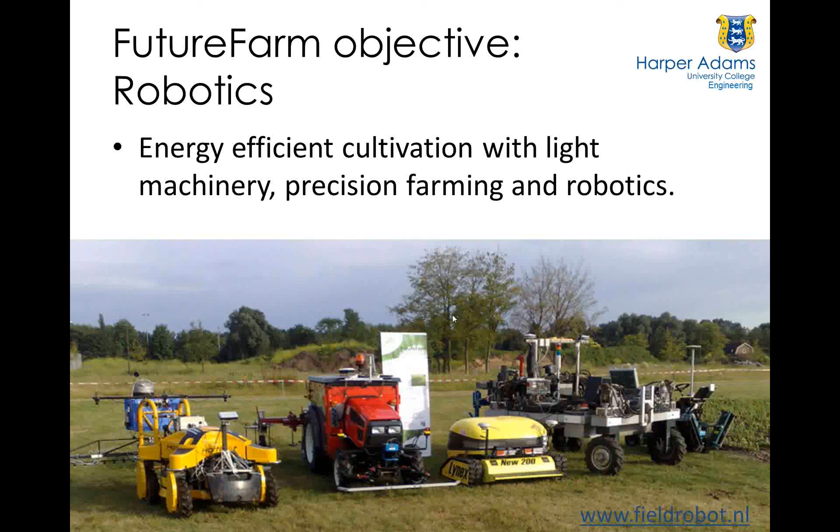Just a little bit of background: before I started here, I was project manager of the European Future Farm project, where we looked at how technology can be integrated together to come up with a better, more practical system. One of the aspects we were looking at was robotics. We had the field robot event, or tried to support it, and you can see a selection of the different robots that came together to show what they could do in practical agriculture and horticulture.

So if we try to look forward, one of the things we often do is look backwards first. If we look at how people perceived agriculture many years ago—we think we're pretty clever now, coming up with automatic steering and driver assist, but there's nothing new under the sun really. The earliest automatic steering system I could find is from 1885.

It's interesting how people considered what agricultural machinery would become in the future, and often it was in terms of industrial type farming, dealing with large areas and big machines, often very efficient machines, but often in terms of modifying the environment to suit the machines.

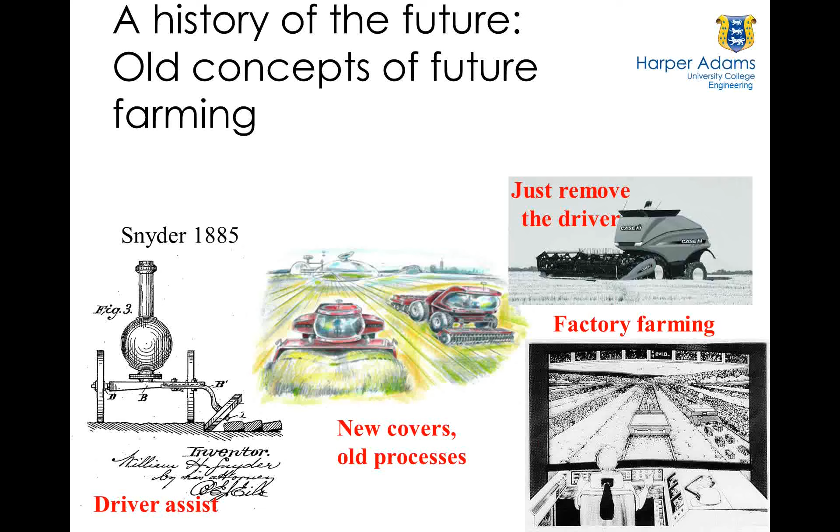But I think we're now at the stage where we should be able to develop smart enough machines to go out into the natural or semi-natural environment and deal with those situations—sensing themselves, sensing their environment, and changing their behavior according to the context they find themselves in. So I tend to think we should make machines smart enough to deal with the semi-natural environment, not laser-plane all the fields into huge, totally flat areas, but make the machines do what we want them to do.

We've seen equipment getting bigger all the time. Current mechanization is very efficient.

The amount of time that a tractor or an operator spends per hectare is getting lower all the time. This is economies of scale, and that's the main reason tractors are getting bigger all the time, to make use of economies of scale. But if we think about the tractors and equipment we see on farms today, are they going to be twice the size in ten years' time? Ten times the size? I think most of us would say definitely not.

So how can mechanization be improved in the future? To me, the obvious way is that it's going to be a lot smarter. In the meantime it's going to be smarter on manned machines, and eventually smart enough to become autonomous.

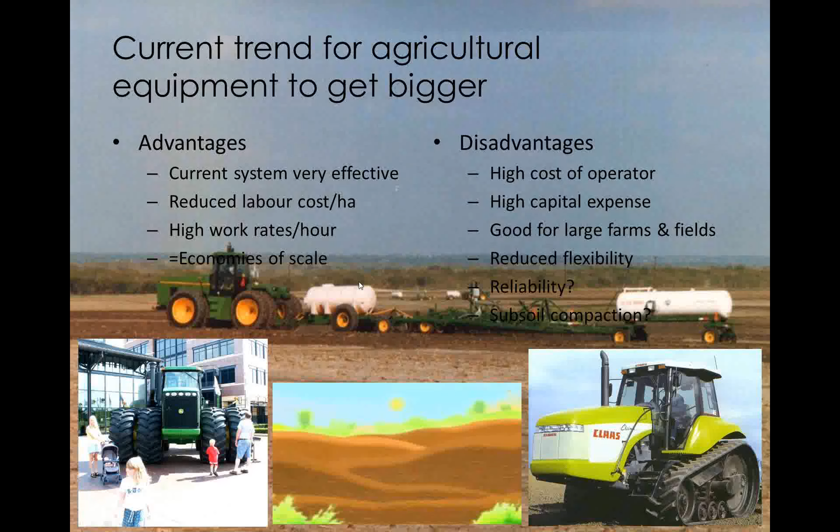So what we're talking about at the moment is a system, as we're developing it in the universities, that will be smaller and smarter. I know Timo's got an exception because he's got a great big tractor that he's robotizing at the moment. But until we know more about what is safety and what is reliability, I think the smaller machines will move ahead quicker. And when we understand what is needed for reliability and safety, it can then scale up to any size machine.

The main driver that made me think about coming back into robotics was the concept of management units. In traditional agriculture, farmers apply the same rate across the whole field—if they apply fertilizer or seed density, it's the same rate everywhere. We saw with precision farming that where there's variability in soil types and yields, it makes sense to divide the field with virtual boundaries to have variable dose rates or patch application.

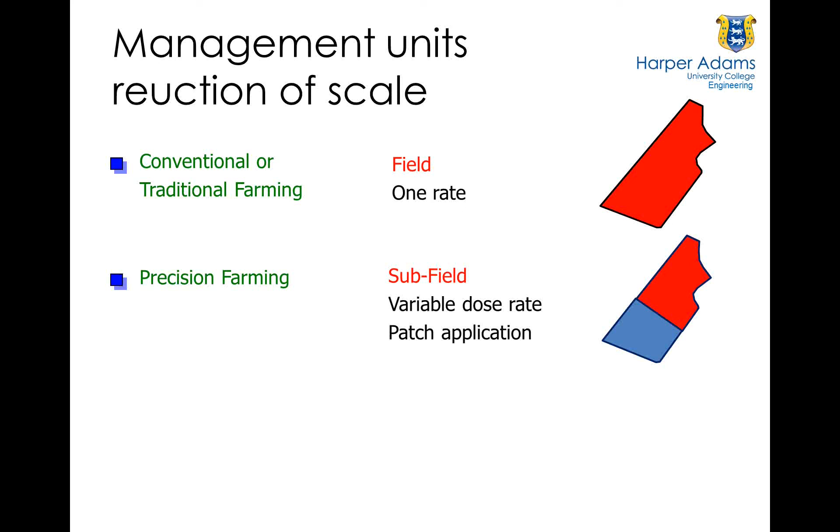We then realized, well, if it's better to get more control over smaller areas, how small can we go? Certainly what we've seen from research is that we can go right the way down to single plant care, plant-level husbandry, or as our Japanese friends call it, phytotechnology—plant level technology.

But of course, if it's a manned machine, it doesn't make sense to treat individual plants necessarily, because it might take too long to treat each individual plant. So there are sort of compromises here.

The autonomous machines are capable of treating each individual plant, but in some respects it's often limited by our scale of management. If we have an on-the-go system that can measure an individual plant and treat an individual plant, then I think we can have full automation.

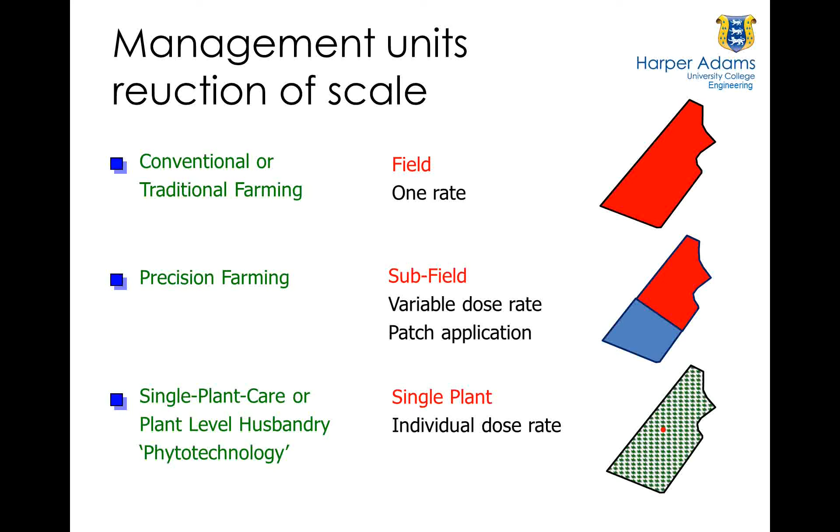But if it requires management decisions to decide whether to put more or less on in this patch, then the size of treatment is the management unit, and that will often be significantly bigger than an individual plant. So we're starting to see the limitations to which these treatment regimes can go down to, and as I say, we do have the possibility of going right the way down to individual plant scale.

I mentioned that I like to take a systems approach to these machines. A few years ago we realized that in modern agriculture there's a lot of pressures on farmers—particularly we found all this out in Future Farm. There's new laws coming on, clean water directives, changes in world prices.

The economics, environment issues and so on—that's on one side. These are all pressures off the farm coming onto the farm for the manager to deal with. And then we've got all of the agronomic requirements as well, of being able to grow the crops that you want. So in some respects what we did was start with a clean piece of paper.

We said, well, if we've got this wonderful range of opportunities from technology that can go right through to robotics, can we come up with a complete new system? Now, I'm not saying that system has been developed, but currently, as a group, we are thinking about how this system should or could develop. It needs to be able to understand the interaction between the machines and what the roles of the machines are, to come up with a system that works efficiently and flawlessly.

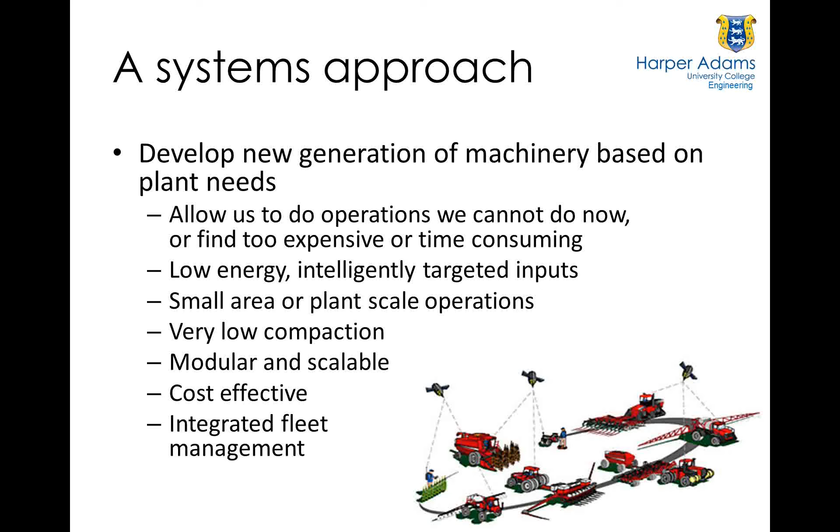And then if we do have a system, it has to be able to deal with fleet management, which is of course what we're also discussing in terms of manned machines as well. So to come up with a system as we're designing it, I decided to use a classic systems approach by looking at agricultural robotics from different perspectives.

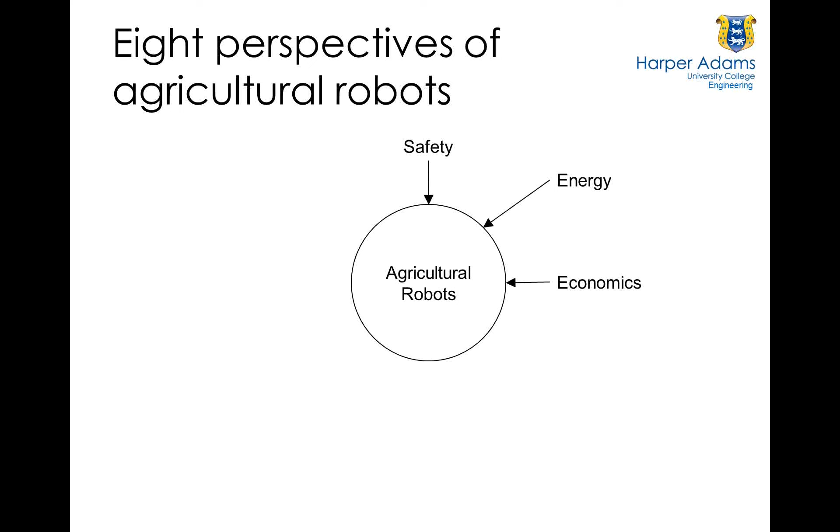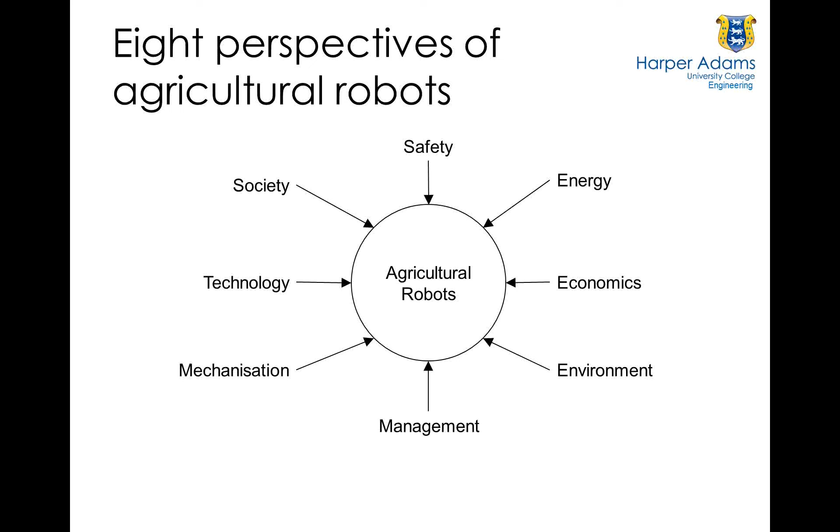So we had a brainstorm in Greece to try and work out what these perspectives would be. I'm not saying this is all of them, but it seems to stand the test of time: safety, energy, economics, environment, management, mechanization, technology, and society. As we develop the system one by one, we can systematically look at our designs from each of these perspectives and make sure that all of those requirements are met - then we're much more likely to have a robust system that is more likely to be successful.

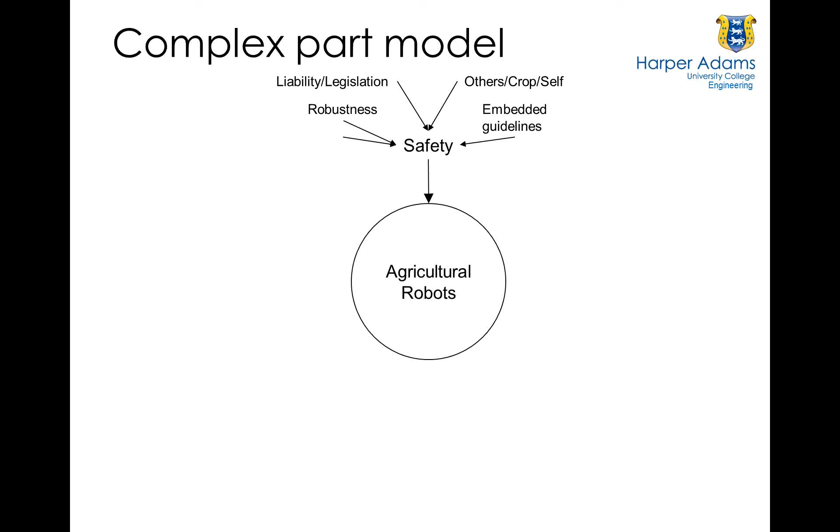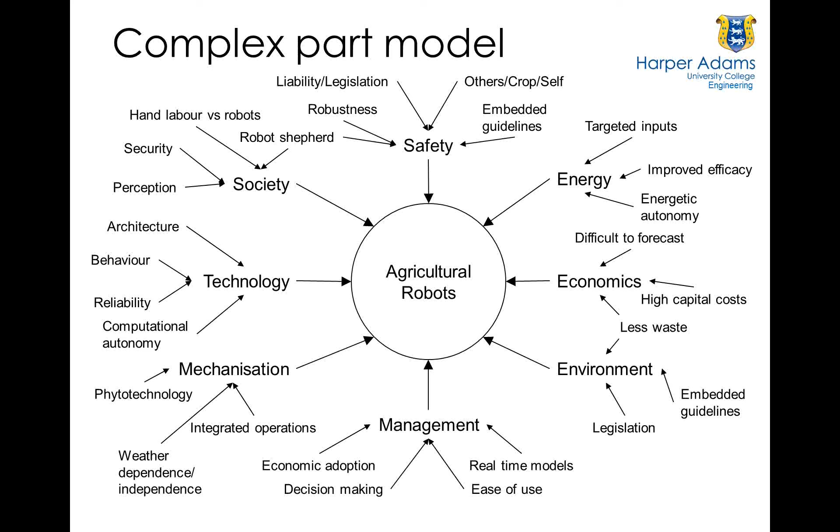The trouble is that this becomes very complex very quickly, and we can go out a few more layers with that again. But this is something we have to do if we are going to come up with a system to carry out these tasks. In fact, I think a lot of the principles we've got do adhere to the requirements from many of these perspectives, so I don't see any real issues with these. I think the things we're working on are meeting the requirements from these perspectives.

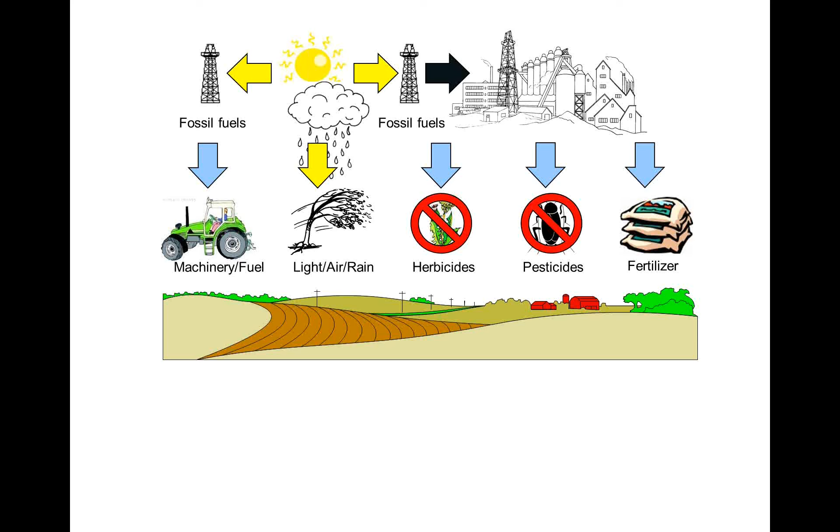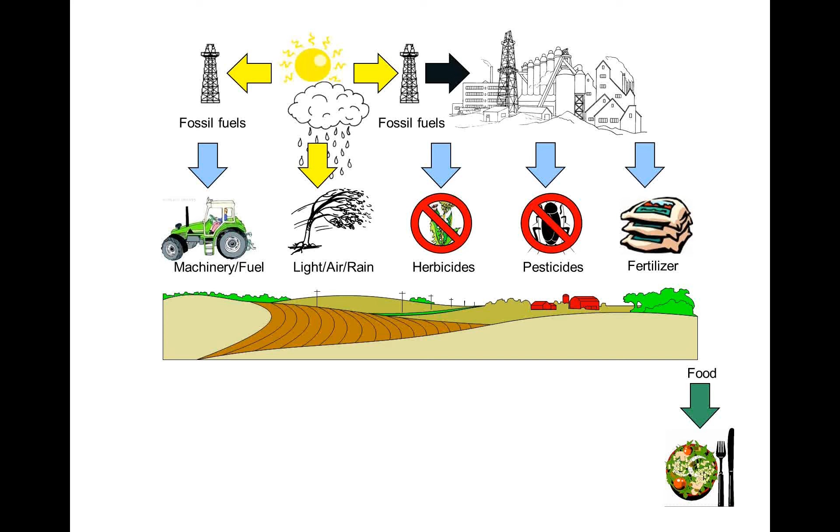Okay, as I mentioned before, energy. If we just look at the whole farm as a system, where does energy come from? It all comes from the sun. It comes directly or indirectly to the farm through light, air, rain, sunshine, and so on. But of course, in prehistory, all this energy was stored in fossil fuels, and we use those fossil fuels to this day for chemicals going onto the farm. That energy also comes through in terms of fossil fuels for machinery and fuel, which gives us a fairly energy-intensive input to the agricultural process. And the output, of course, is the foodstuffs that we then sell or eat.

But we've also got issues of pollution, waste, and biomass. We've seen recently a lot of interest in energy crops, and we've been considering: can we have closed-loop systems, energetic autonomy on the farm? When we thought of this, we thought, great, we can grow energy crops on the farm and fuel the tractor - this is going to be really good. But it reminds us once again that there's very little new underneath the sun, because that's what farmers used to do 100 years ago with their horses. Instead of a tractor, they would have a horse, and the horse would eat the grass off the field, so there was an energetic autonomy system there many years ago.

But what we're trying to do now is look at intelligent placement, so as to reduce the amount of energy coming into agriculture. Excuse me a minute.

Excuse me, I've got a bit of a dry throat.

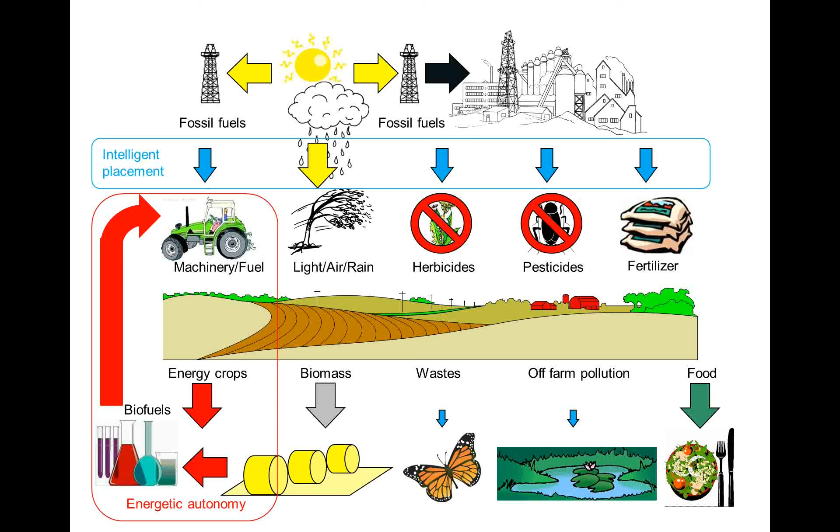Reduced or intelligent placement will then give us a reduction in terms of the energy going into the system, and be able then to reduce the wastes and the off-farm pollution and things that we don't want.

So that brings us to robotic agriculture, which I am trying to develop the concept of it being multiple small intelligent machines that in certain niches can replace large manned tractors, multiple machines to increase work rates, longer working hours, safe and reliable, easy to manage.

Developing this concept of a robot shepherd a little bit more. For many years, when I was trying to develop robots, I was trying to take people out of the system and to get the machine to work entirely by itself, and I realized that that's an absolute fallacy. Whatever we develop, people are still inside the system.

They may not be sitting on the machine as they do with the tractors at the moment, but the person is, in terms of the system, very close to the machine, because the person is responsible for the machine, and the machine is doing what the person wants to do.

And so the concept of a robot shepherd might now be that you might have multiple robots working in the field, and the person then might be overseeing these machines, or at least being in continual contact with these machines whilst they're doing other things.

And so in many respects now we need to reinvent mechanization to give smarter machines that can care for these individual plants. Lightweight, small, autonomous.

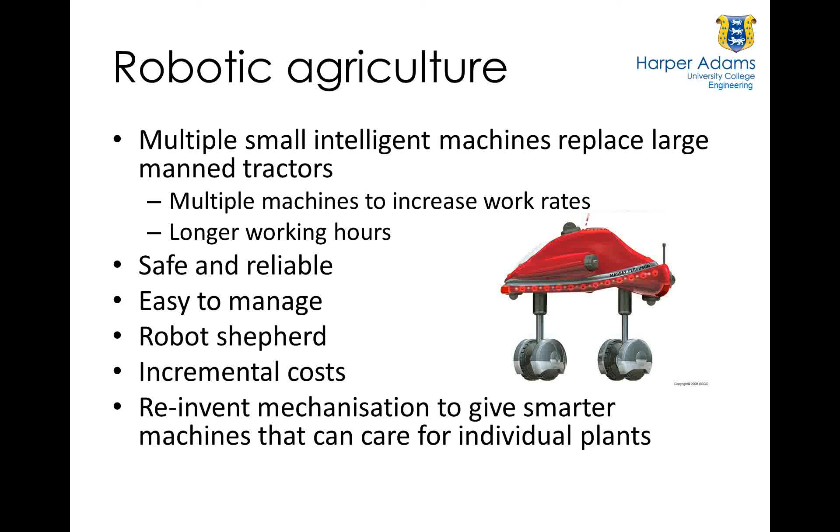One of the things that we're often trying to develop, and it is a genuine challenge, is computational autonomy. What I mean by that is that we've got all of the hydraulics, electronics, mechanical arrangements. We can have legged robots, wheeled robots. All sorts of good engineers can produce these things for us.

But can we come up with a computational system that is autonomous, meaning that it can cope with all of the situations that are then thrown at it? And of course it requires a lot of perception, a lot of sensors, a lot of understanding of the context. And in some respects this is the hardest part of agricultural robots, or in fact of any type of robot, is in terms of how do we put enough smarts into the machine to get it to do what we want it to do in an automatic way.

Some groups, particularly at Bristol Robotics Laboratory, are developing concepts of energetic autonomy, meaning that, again, a little bit like the closed-loop system, there are some robots that are running on sugar at the moment, and in fact, would you believe, on dead flies, and there is a biodigester that is actually working on slugs. There is a robot that can go out and recognize these little things that eat the lettuce plants and can put them into a biodigester and get energy from them. But these are highly inefficient and not practical, though they have been demonstrated.

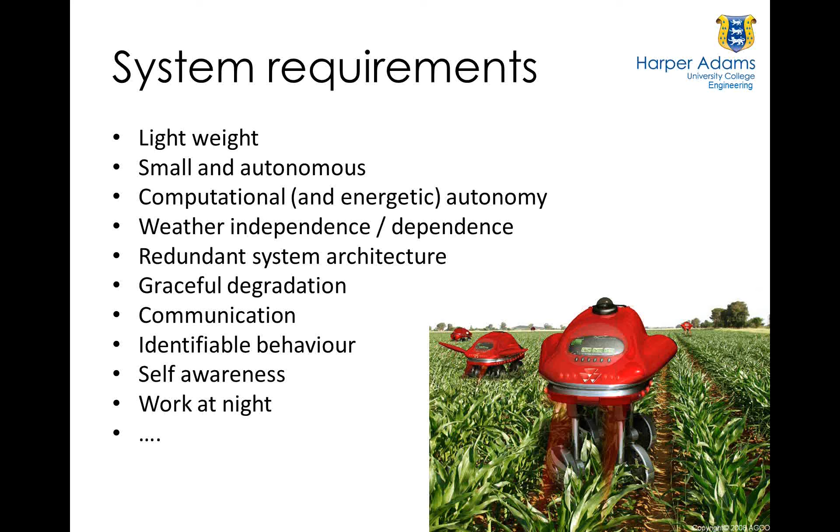I've got identifiable behaviours there, and this is my approach to how we design what the machine does—I'll leave that for another presentation. But it's effectively the concept of identifiable behaviours and the ability to switch between them. We need to understand the context to do that, and it should be able to work at night and so on. So there's a whole range of different requirements and opportunities.

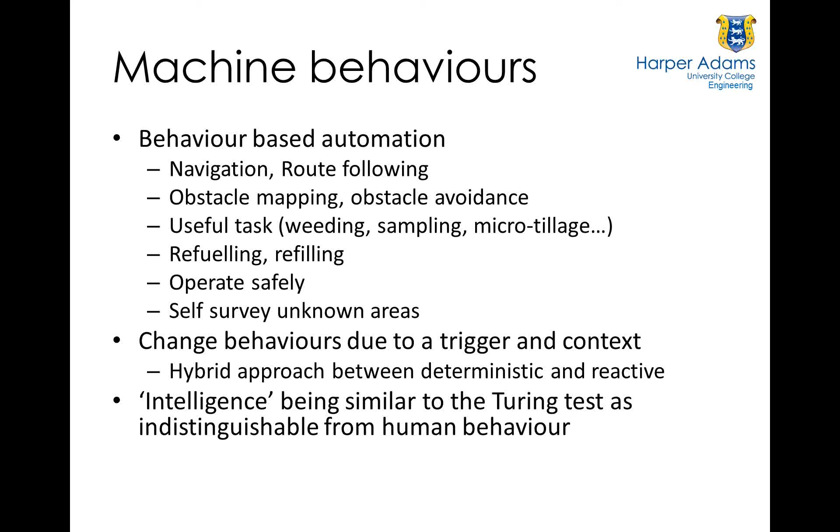We need a system that can cope between deterministic and reactive behaviors. Intelligence is overused as a term, but like the Turing test, it's about being indistinguishable from human behavior. So if the robot's out in the field doing weeds and behaving the way you or I would, then we could consider it useful to us or on the verge of intelligence.

The behaviors themselves are divided into two tasks: purely deterministic and purely reactive. The deterministic task can be determined beforehand—if we know the field, the machine, and the working width, we can plan out a route.

The reactive tasks are those that react to unknown situations with predefined behaviors. They don't need to recognize every specific thing, only the class of the problem. So if there's an unknown object in the field that becomes an obstacle, if it's dynamic we wait for it to get out of the way, and if it's static the robot goes around it. We don't necessarily need to identify what the obstacle is, just that it is one, and react to it suitably.

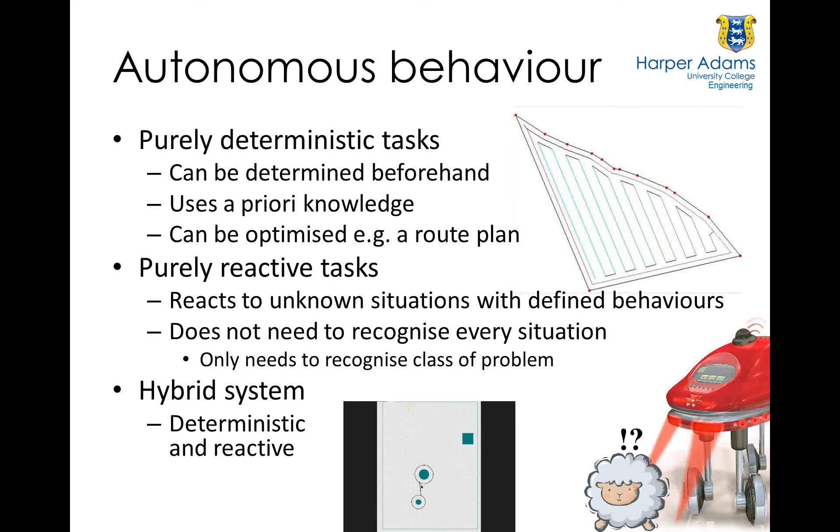A hybrid system is the best of all, where we have the ability for both types, because the manager will want to optimize what the robot or tractor does in the field before it goes there, but it must also be able to deal with reactive situations.

So deterministic route planning, where we get an optimal route plan to follow beforehand—Timo's an expert in this area with field segmentation, but there are other techniques as well, in terms of skip rows and alternate ways of planning what the machine will do.

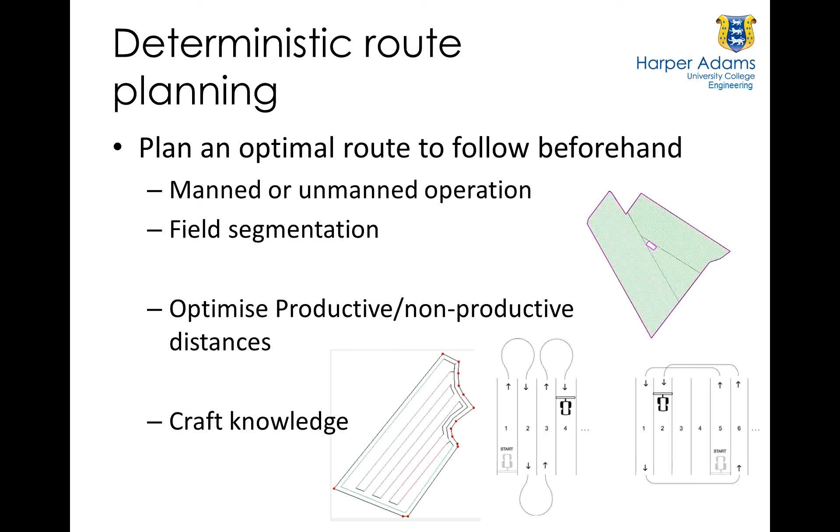Particularly what we do at the moment is craft knowledge, where we just choose the longest straight edge down a field, and most of the operation is done in parallel to that. But many other fields become a lot more complex than that, and it's not so intuitive, so we do need to find ways of optimizing this.

In Future Farm we had a go at doing this. If you find a website, web-farming.com, you can log into this site, and it's a mashup with Google Earth. You can go anywhere in the world and click on the outline of a field, tell it what sort of tractor or model you're going to use, and it will come up with the first version of an optimal route plan. We need to do some more work, it's a work in progress, and if anybody has good algorithms they'd like to use with us, I'd be happy to incorporate them. But to me, this is the next logical operation beyond the current A/B lines that tractors are using, that will move directly into full route planning.

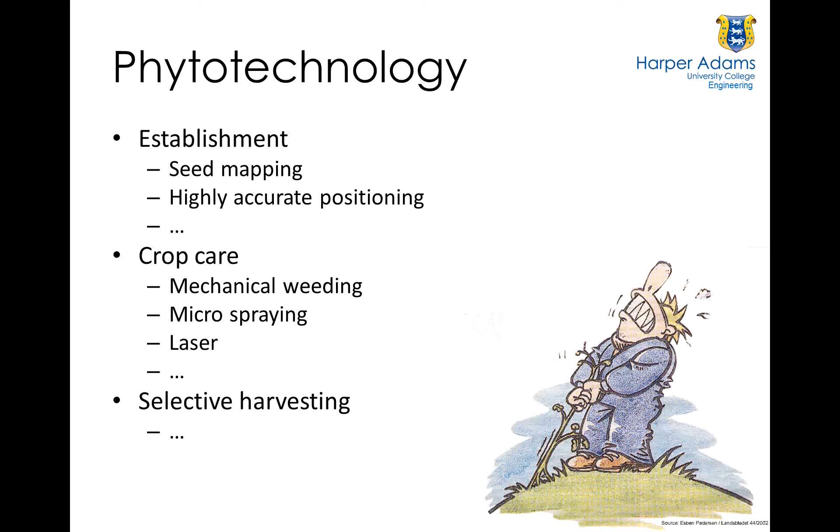So if we move on to phytotechnology, the concept where we are designing a system that does not have the current constraints that we have with existing machines, but we've got the ability to design what we want according to crop needs. It falls into three main areas: establishment, crop care, and selective harvesting. So I'm going to go through some examples of these.

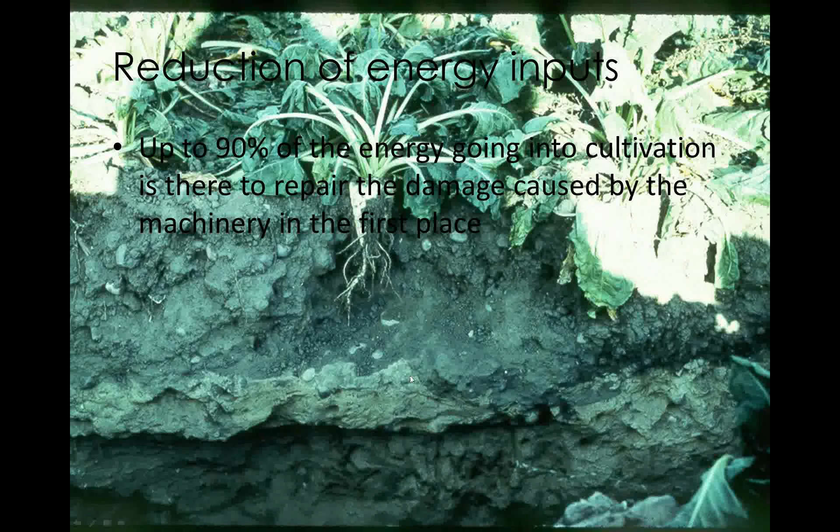Now that's ridiculous, meaning that we're out there moving around with these big tractors, and the reason we're out there with big tractors is that we have to have a big tractor to be able to rip up the compaction. But the trouble is that the big tractors have caused the compaction in the first place. So we've got a real catch-22 situation there. It's important for this system not to cause compaction in the first place, in which case we don't need to have the big machines to rip it out.

We're developing new terminology in this area, particularly when we're talking about plants and seeds. So we've been developing the concept of a seed map. I'll show you an example of how we can automatically produce a seed map, where we can get the geographic coordinates of every seed that goes into the ground. With RTK GPS giving us 2 centimetre accuracy, we can do this relatively easily.

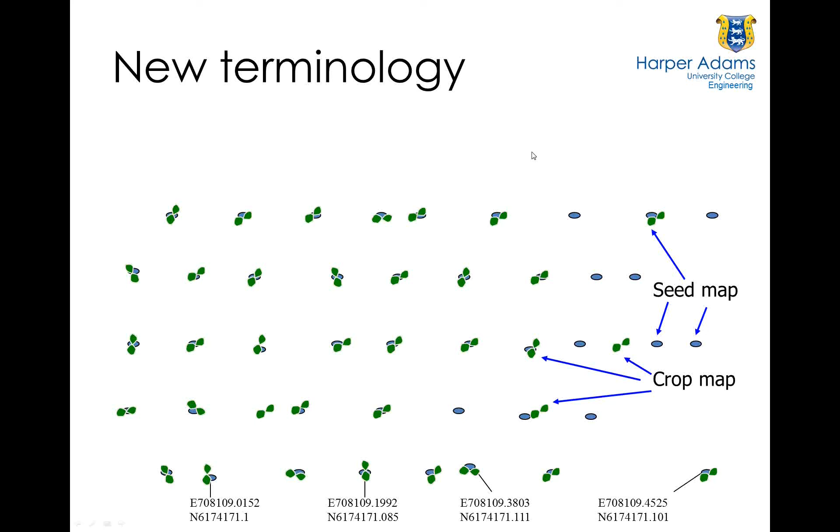The next concept is a crop map or an emergent map. Not every seed will produce a plant, and sometimes the plants will come up in different places from where the seed is, but we can use this information later on when we come to the weeding system. We've then got the concept of the weed map, where weeds are scattered maybe in a random manner or in patches over the field. The crop is established in lines, but the weed is established in a more random way.

We then have the inter-row area between the rows and the intra-row area, which is between the plants within the row. And then the final concept is the close-to-crop area. This is important, particularly when we come to mechanical weeding, because we have to take extra care if we're putting a machine into this area, because we don't want to damage the plant canopy, and we don't want to damage the root zone.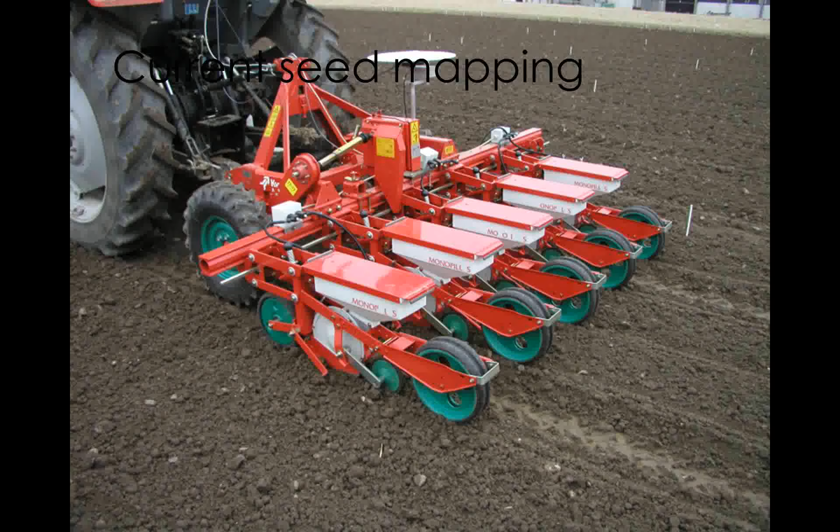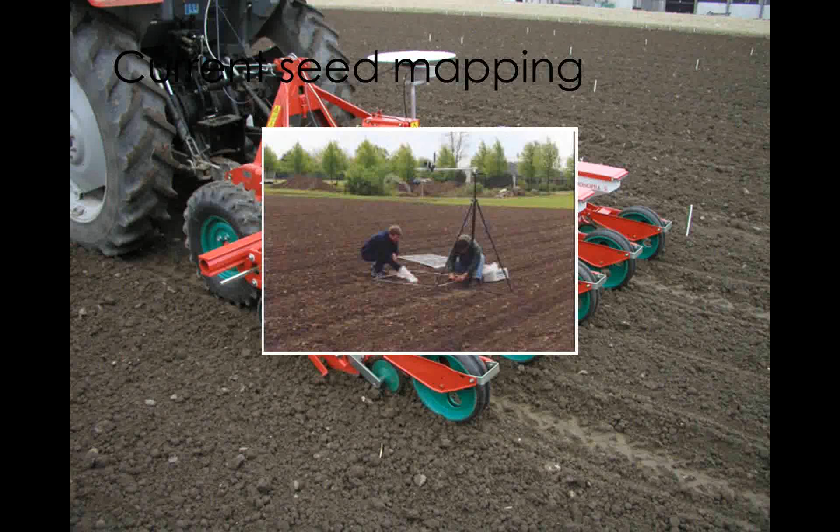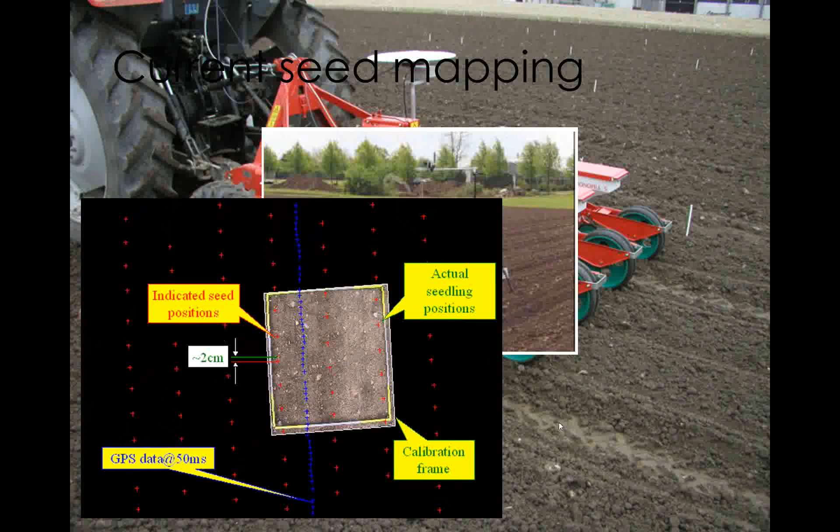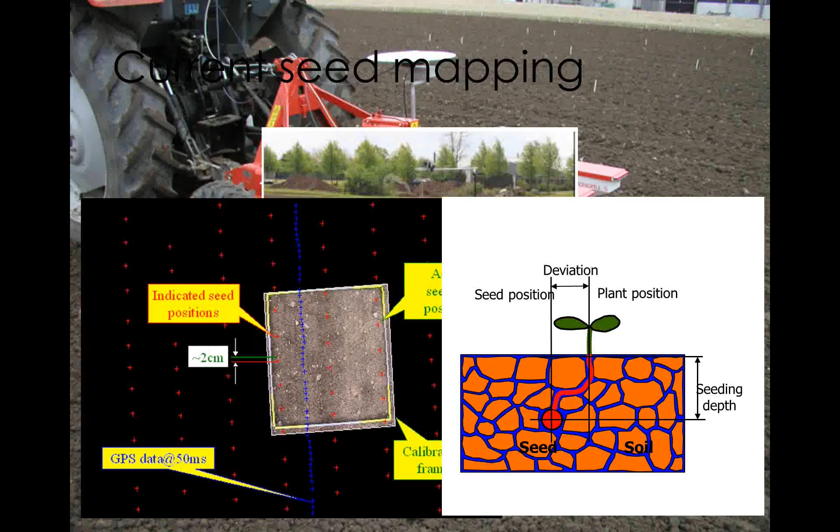So here's the seed mapping system that we developed in Denmark. It's a standard high precision seeding system, but this has got an RTK GPS on it and some electronics with light beams underneath each of the seed chutes. Every time the seed drops down through the chute, it breaks the beam and we can record the position. We create a quadrat out in the field with a camera over the top looking down, and we can georectify the image on top of the seed positions. We can then usually find out that the seedling emerges within 2 centimetres, which is what the GPS is rated at. But we have to bear in mind that we could put the seed into one position, and through aggregate sizes and other reasons the plant can actually emerge elsewhere. So the whole thing is normally within a couple of centimetres, we can know where the plants will be.

One of the issues we've been dealing with is mechanization in terms of agronomy making life simpler for the machine. If you've ever wondered why we grow crops in rows, the reason is that it makes it easier to develop a machine. Right from the first days of cultivation, where the caveman was out in the field dragging a bent stick behind him, creating a furrow and putting seeds into the ground, that was a very simple machine, and we don't need to be limited by that anymore.

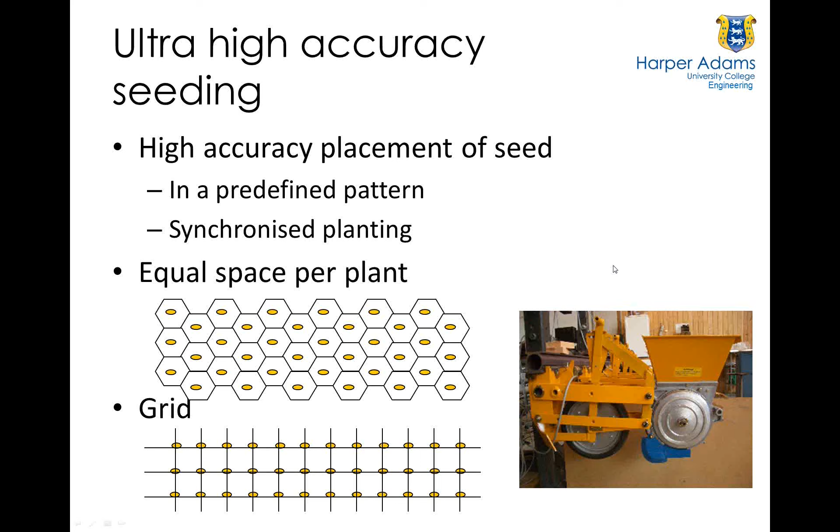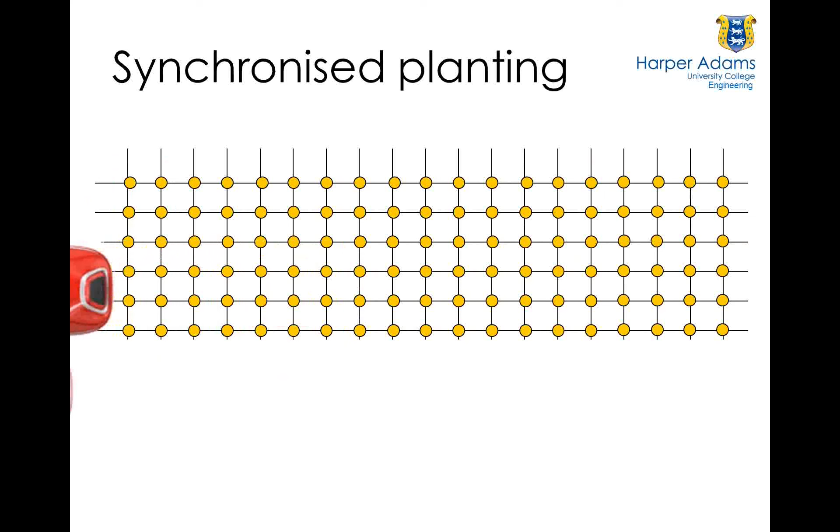What each plant needs is equal space and equal access to resources in that space. But in fact we're still getting rows, just in a different direction now. This brings us to the concept of grid seeding. Again, there's nothing particularly new in this, because they did that with horses more than a century ago. If we can get robots or even manned machines to come back to the concept of synchronized planting, then we're optimizing the area for each plant. And if the weeds develop in a random manner, we've got the ability to do orthogonal inter-row weeding, which doesn't need any intelligence at all, just follows up and down the rows, but can take out all of the weeds.

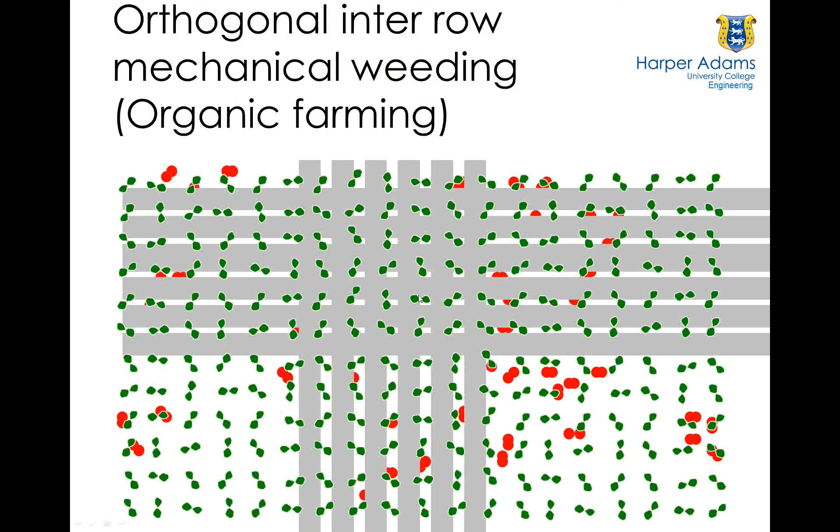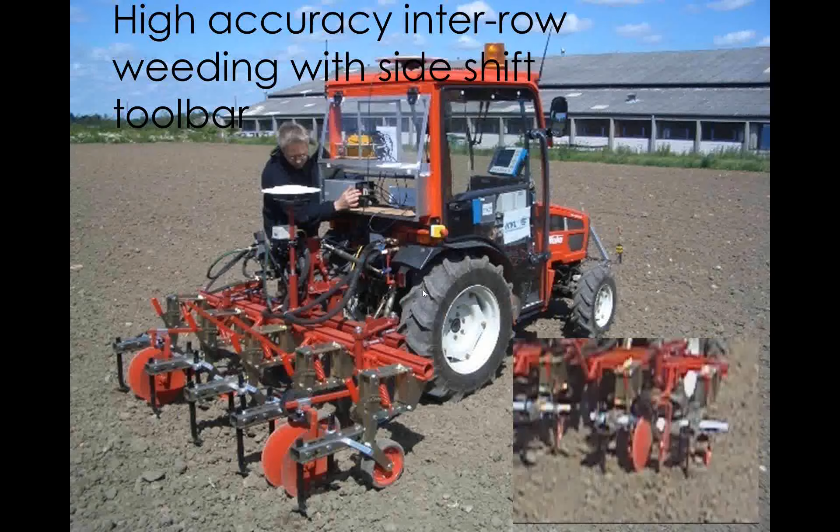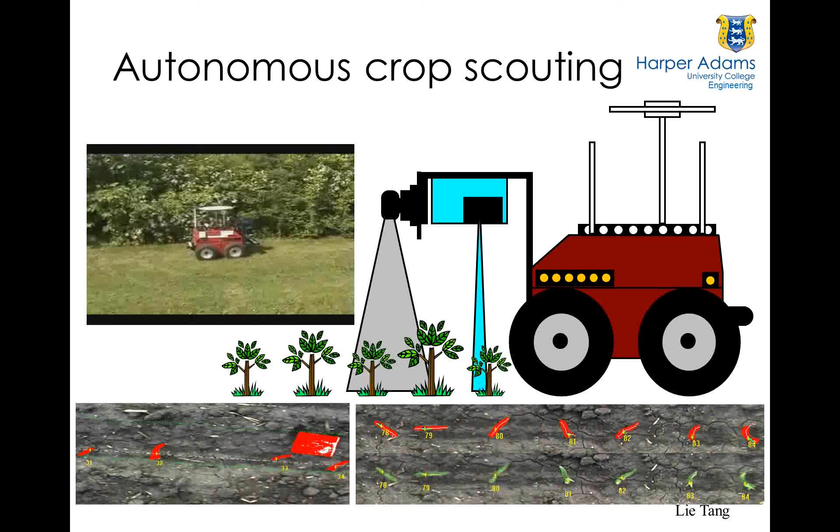Here you can see the crop scouting robot. The API platform, again, was done in Denmark, essentially a mobile instrumentation platform.

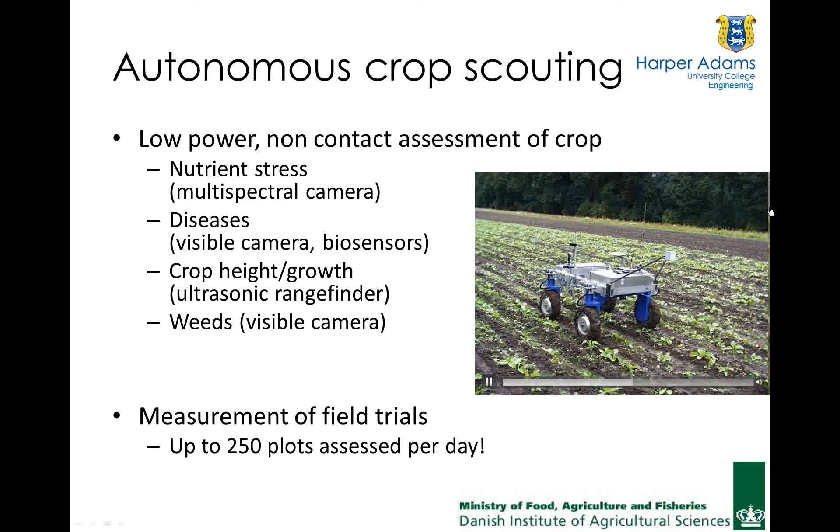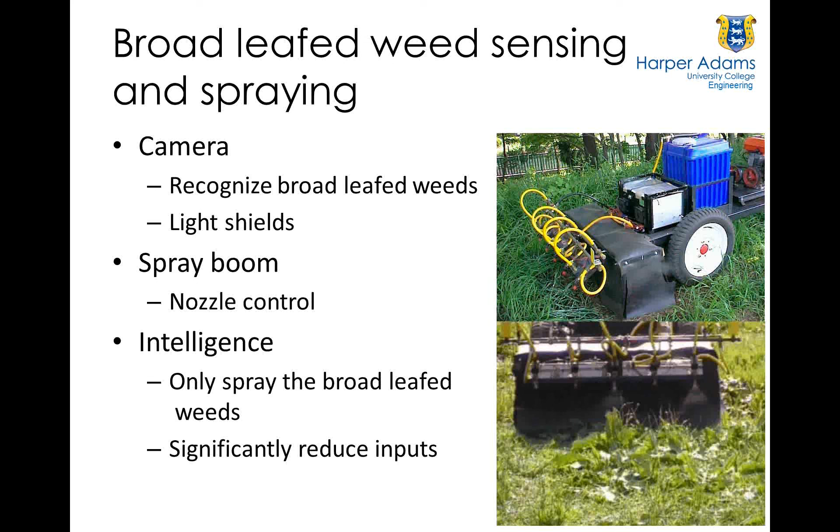In Japan, a lot of work's going on with smart machines. This video was taken a few years ago, showing a broadleaf weed sprayer with cameras underneath the black plastic, where it identifies the weeds and will only spray the broadleaf weeds. I think they were saving 50 to 60 percent of the spray at that time.

What has been developed, again in Denmark, is a weed recognition system using active shape recognition. I think we've managed to get up to 26 different species of weeds, and if we know the species and the leaf area, we can then work out the amount of weed killer needed to kill that weed. I know that work is continuing at Southern Denmark University, and they're doing some very interesting work there with microdot spraying.

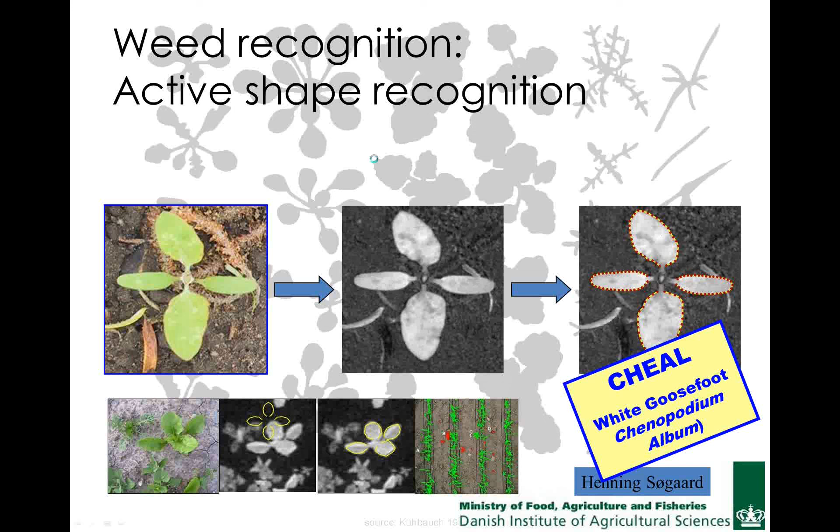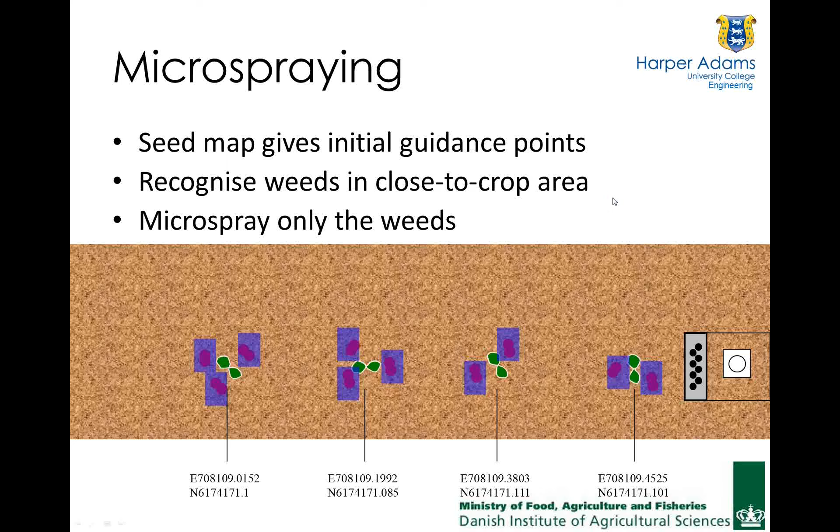So micro spraying - if we've got plants and know where they are, and perhaps weeds close to the crop area, we can have a machine vision system that goes along and uses a micro sprayer, developed by Dave Slaughter at University of California, Davis, to only apply weed killer to those areas. Here we can see it being fitted onto the API robot.

We've got some leaves on the ground, a webcam looking down, and then effectively a large inkjet printer squirting the glyphosate onto that. We're seeing that we can reduce the recommended dose rate in particular crops from 720 grams per hectare down to 1 gram per hectare.

Normally when we're developing these systems, if we can save 5% here, 10% there, that's good. With the microdot system, I know they're now potentially saving 99.99% of the glyphosate needed. So this type of work is going to have a significant impact on what can be done in the future.

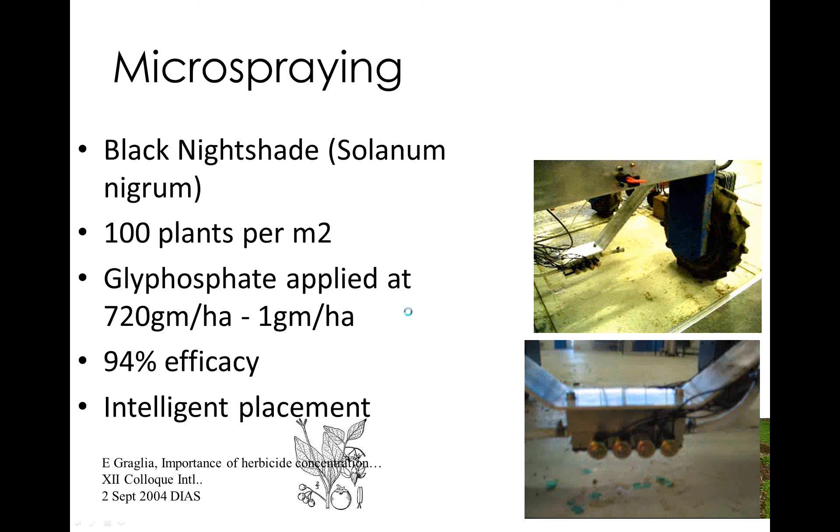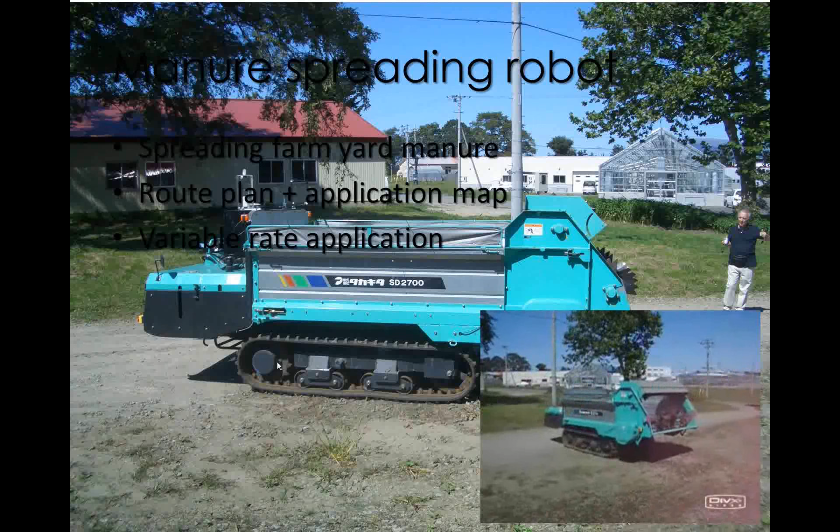And some other examples from around the world. We are farming, dealing with farmers, and dealing with muck spreading is a particular task, so you can see here an autonomous muck spreader that was developed in Sapporo in northern Japan.

In organic farming, we use manual labor as a way of extracting weeds. People don't particularly like doing this, and it's very expensive and very demeaning. It's hard work, and so therefore we should be able to come up with better systems.

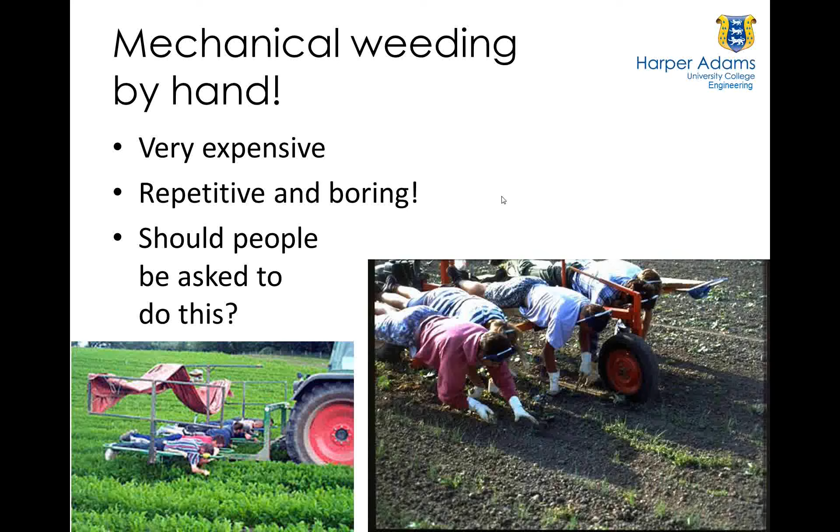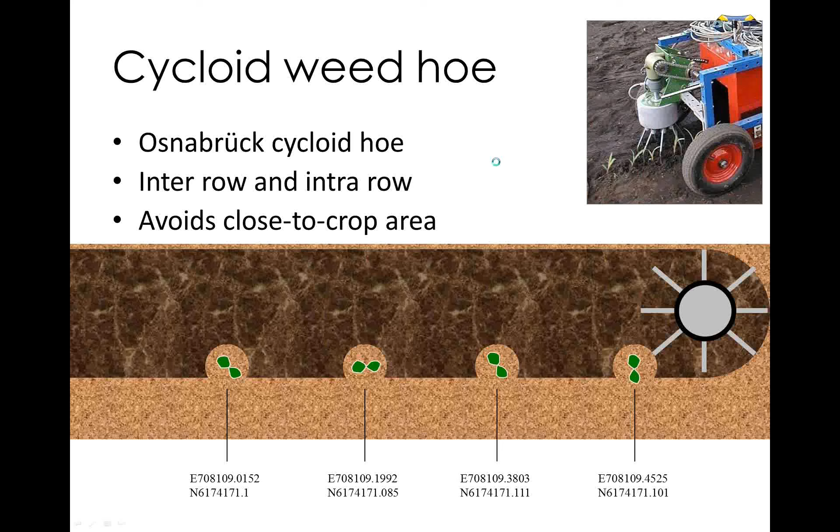One system we used was the cycloid weed hoe developed by Arno Ruckelshausen in Osnabrück, which weeds both the inter-row and intra-row area at the same time. Because we know where every plant is, we can withdraw the leg to avoid the plant, and hopefully in the right-hand corner you can see the weeding system coming through here.

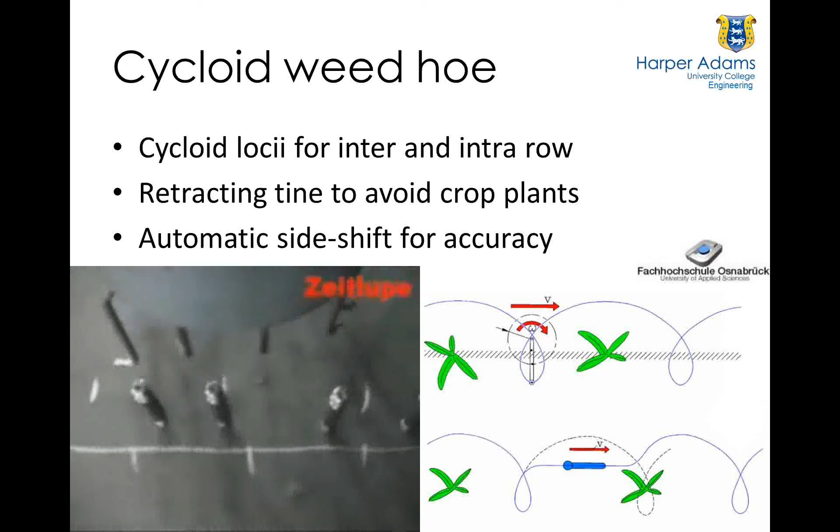That system worked quite well. It's a little bit of a complex mechanical system, but the nice thing is there's no weed killer needed here, so it's very suitable for organic agriculture.

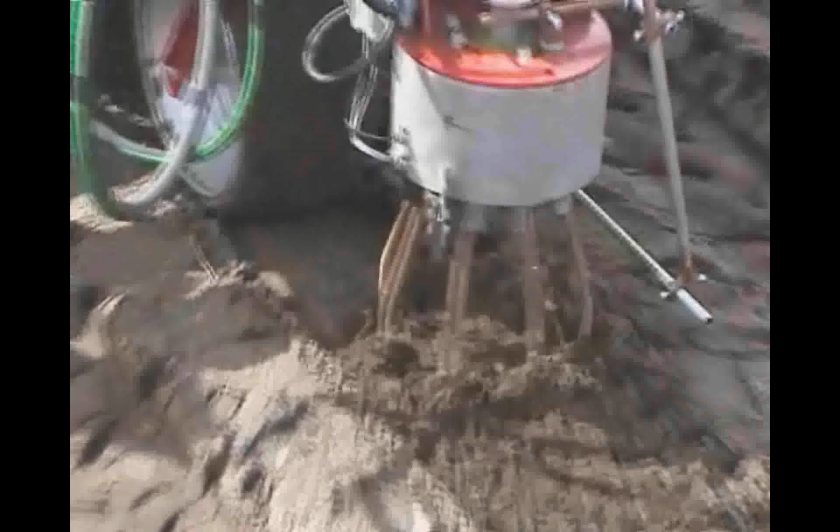You should be able to see a full screen video now of the autonomous tractor we developed in Denmark with the side shift toolbar, looking down at the cycloid weed hoe. So we're actually coming up with a complete mechanical weeding system here that can run by itself.

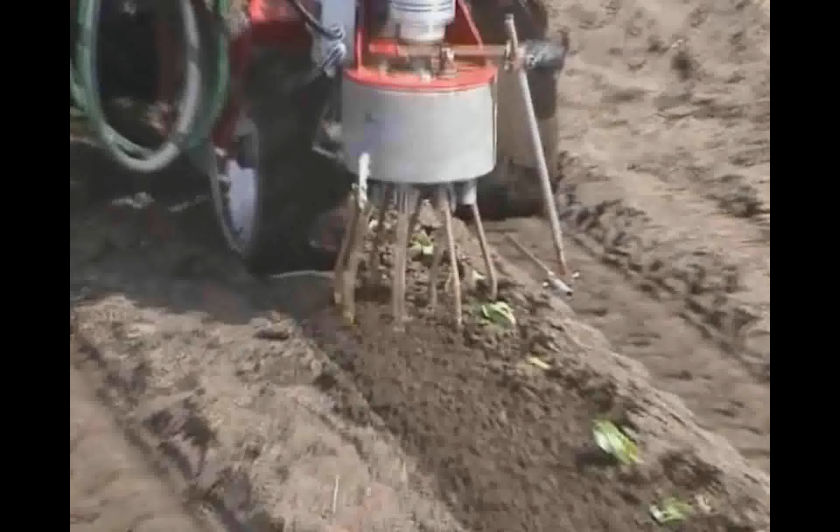You can see that the leaves are moving, probably due to that 2 centimeter error we're getting from the GPS, or 4 centimeter if it's plus or minus 2 centimeter where the seed went, plus 2 centimeter where the tractor is now going. So sometimes it gets too close, but that can be tuned out of the system.

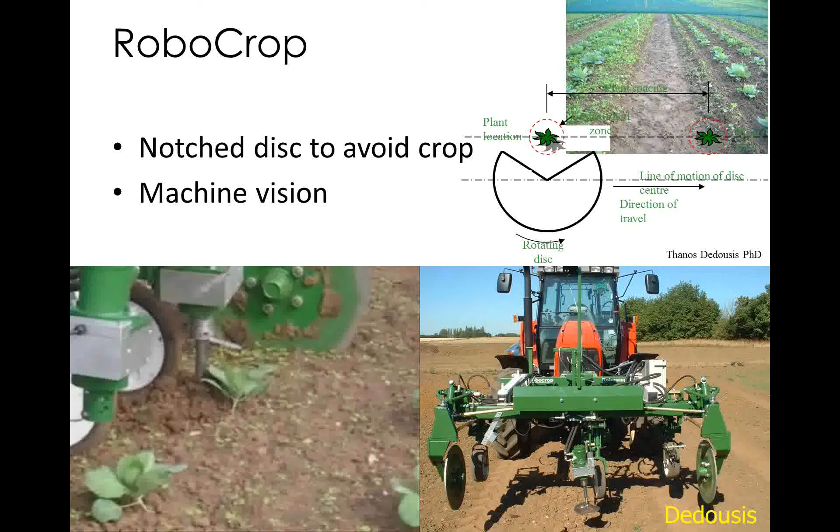Some of this work has been commercialized. There's a company called Garford selling a product called RoboCrop. It doesn't use GPS, it's got a machine vision system on the front looking down that can identify each of the plants. This particular one has a notched disc underneath it, and it synchronizes the disc to the plant. Again, you see it's moving the plant, which it shouldn't really do, but I know a later version uses a rotating tine, and that seems to be very successful.

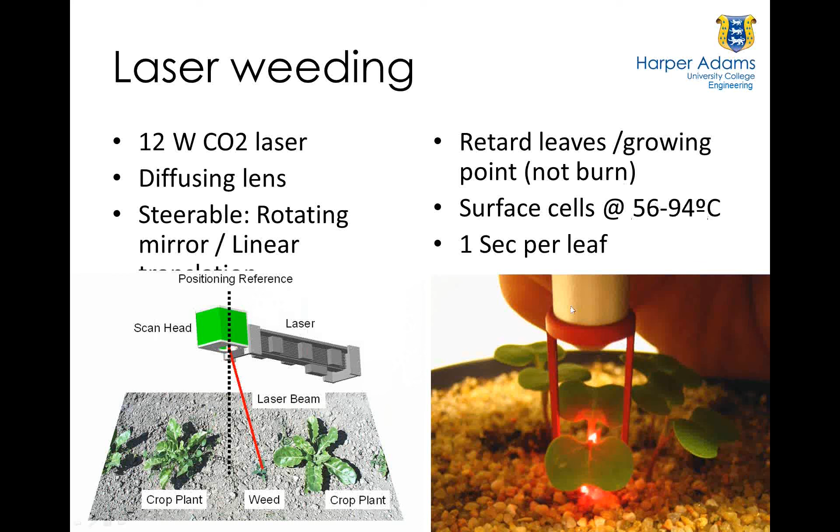We've been looking at laser weeding, so the ability to kill or retard the weeds is an important thing without a mechanical or physical method. We saw before that we were able to see the growing points, so with the laser we can heat it up to between 56 to 94 degrees C, whichever the species is, to rupture the cells and set the plant back. So we can create a weed-free area using lasers, but of course you have problems if there's occlusion.

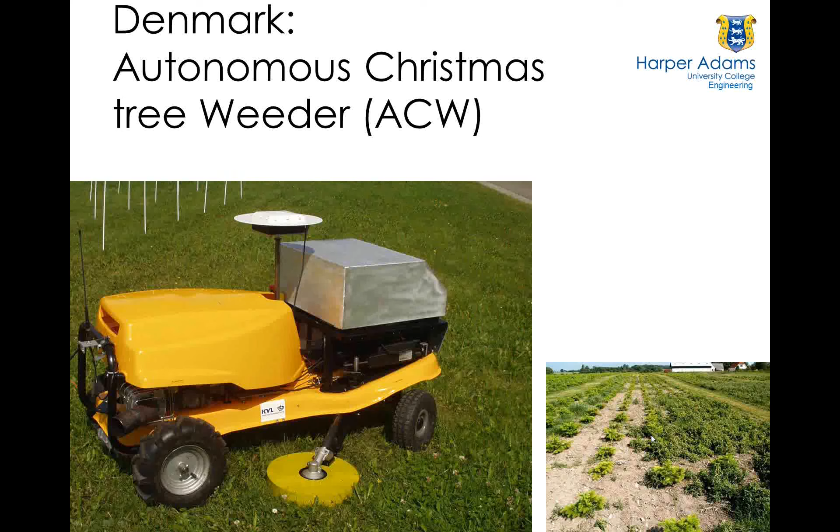This is the autonomous Christmas tree weeder we developed. These little plants are young Christmas trees. It's an important agricultural crop, although they're trees, it's not forestry. You can see a big patch of weeds growing on top where it's damaging. There was a little video of that machine, but it doesn't seem to want to work at the moment. Here we've got a side cutter, and the robot goes down the row, and the side cutter cuts all of these weeds, particularly in the intra-row area.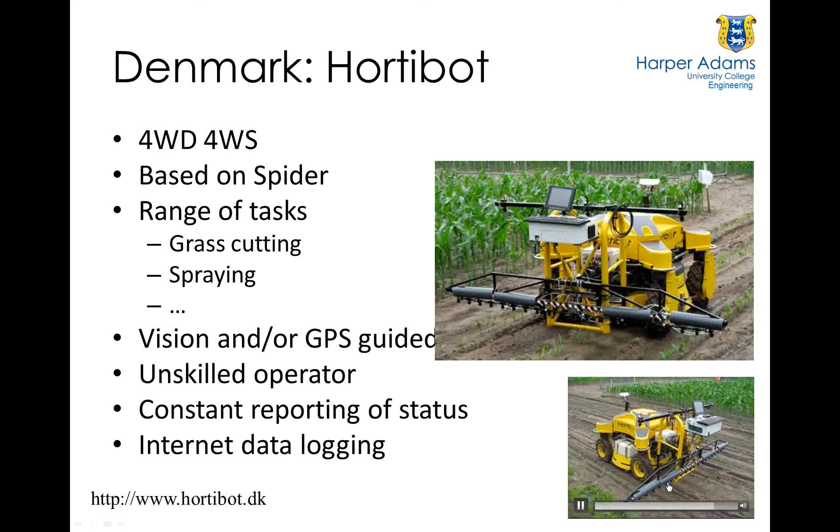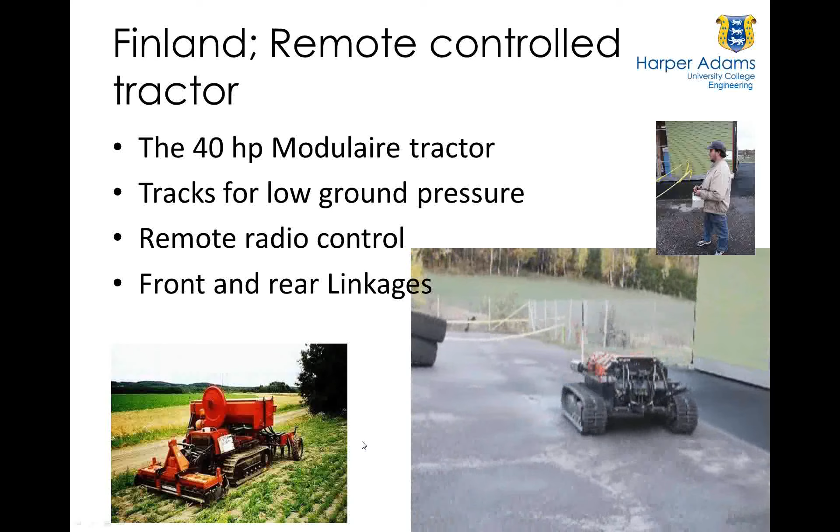Southern Denmark University is developing the Hortibot, the spider grass cutter that's been modified to take a smart sprayer, so machine vision recognizes where the weeds are and only sprays onto those areas. The Modulaire has been around for many years, and I don't know if Timo or others in Finland are working on this to put enough smarts into the machine to get it to work by itself.

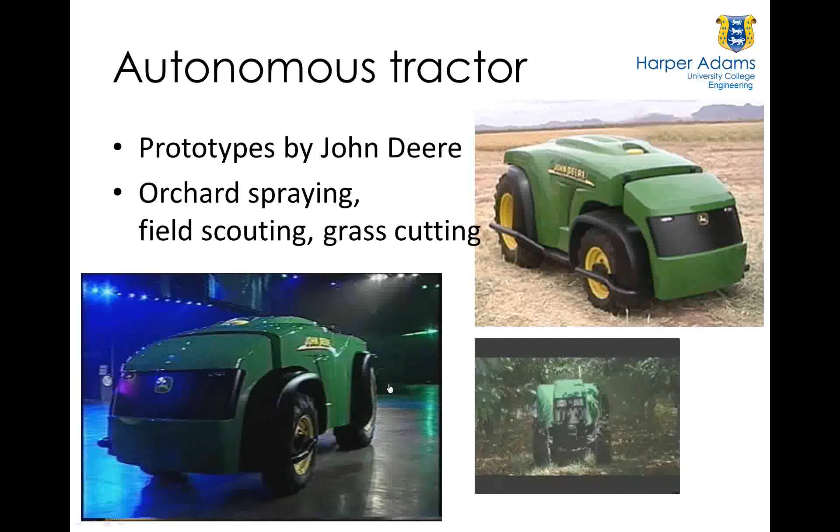John Deere are probably leading the way in terms of automation and robotic tractors. These have been around for some time now, and I know that Marcel and some of his colleagues there are busy working on these projects as we speak.

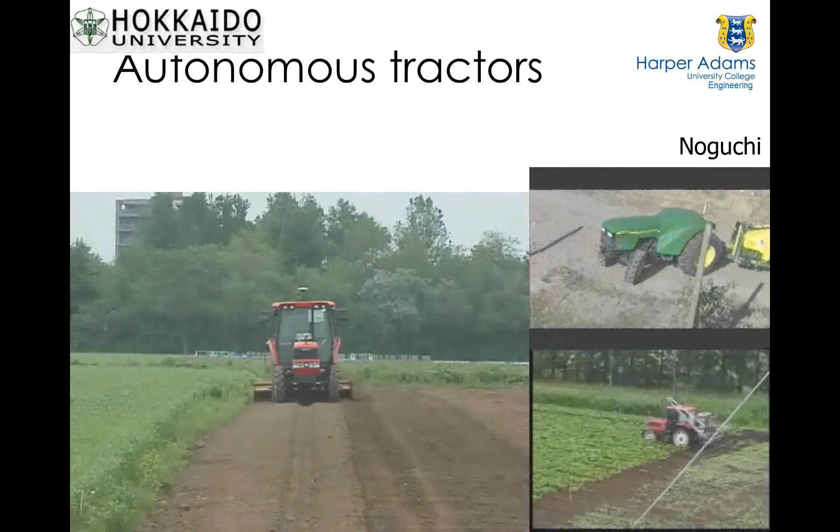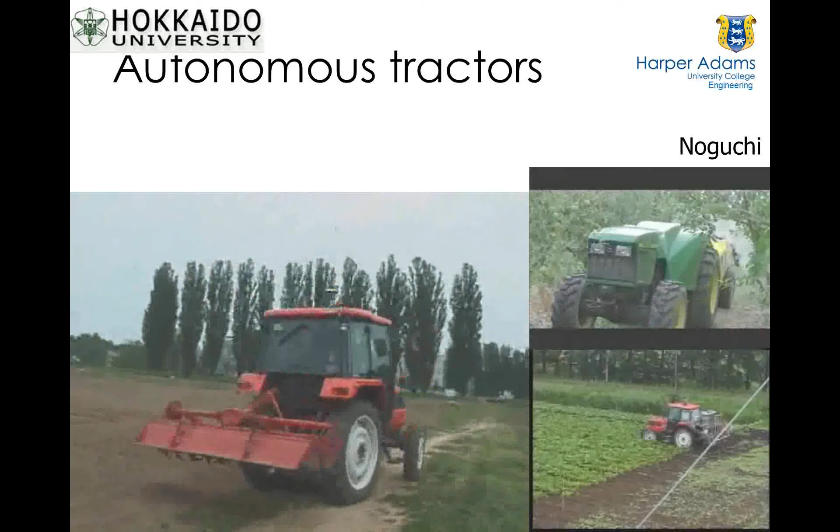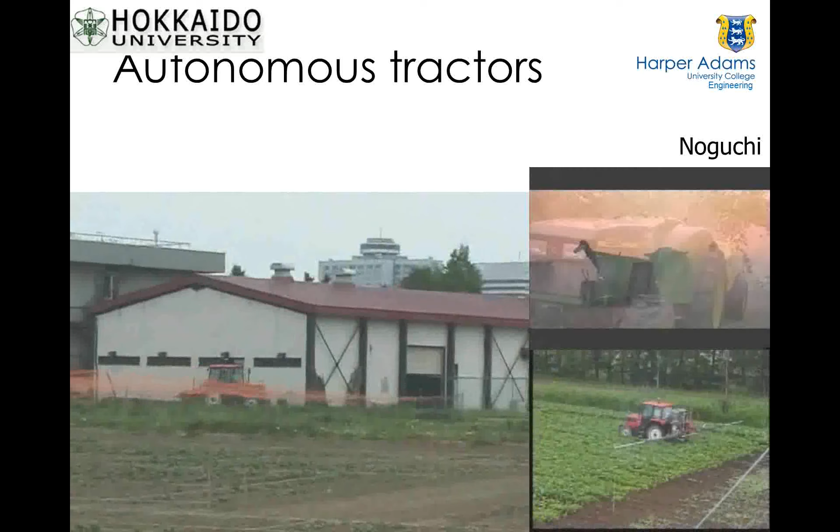Again in Japan, Professor Noboru Noguchi is one of the world leaders in this area. I must point out I'm very pleased that he's accepted an invitation. He's going to come to the UK in November, and he's going to be working with us under a Royal Academy of Engineering Distinguished Fellow Scholarship to help develop our new range of machines. He's got a big project on at the moment looking at a whole range of autonomous farm operations.

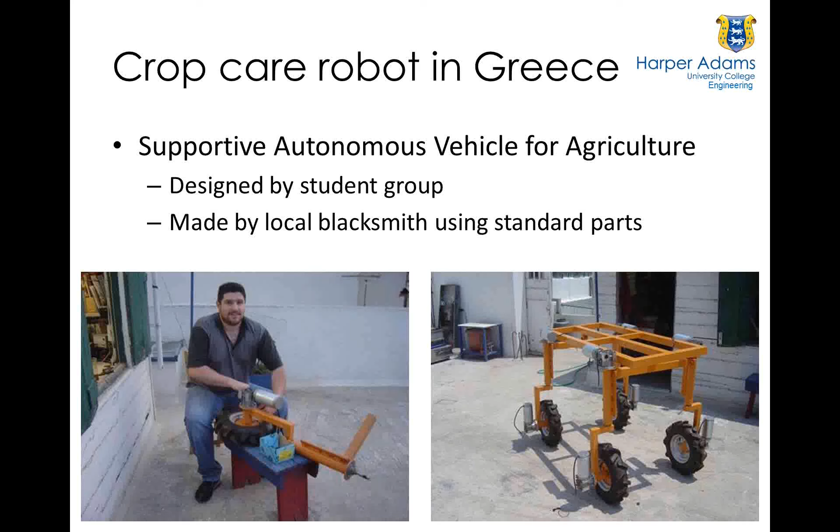I've been working with some friends and colleagues in Greece who've been developing the SAVAGE robot, which a couple of master students developed, and we're continuing to develop that. It will be an instrumentation platform carrying all sorts of equipment - an RTK GPS with lasers and NDVI cameras.

The nice thing is that it can have a treatment map for water, but it can also have a different treatment map for chemigation, because we can adjust different rates of fertilizer, pesticides or other chemicals to give us what we want in terms of chemical application.

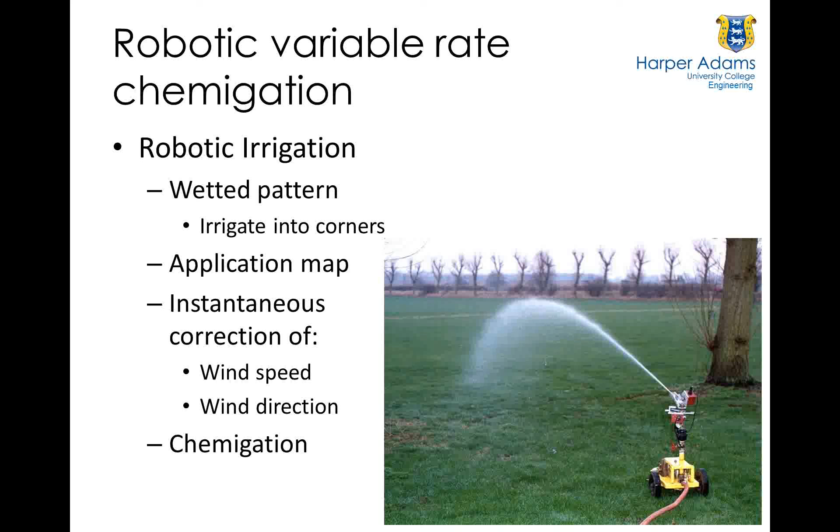The interesting thing about this system was that it could irrigate into corners. Normally these things just go round and round, and you've probably driven underneath them as you go along the road and they squirt your car. With a robotic system like this, it can actually irrigate into corners and make sure that it doesn't go outside of where you want it to go.

My particular area of interest is how to develop enough smarts to go into the machine. How do we develop machine intelligence to get these machines to go out and do what we want them to do? So I've been developing SAFAR, Software Architecture for Agricultural Robots.

We're also using that on the SAVAGE robot. As it is hardware independent and uses Microsoft Robotics Developer Studio, there are a lot of useful tools in there that have allowed us to move ahead very quickly.

So in conclusion, equipment's obviously going to get smarter. It's getting smarter in the commercial area. Improved automatic control of well-defined tasks is coming closer all the time. Automated data gathering, better processing into real information, and the possibility of fully autonomous vehicles.

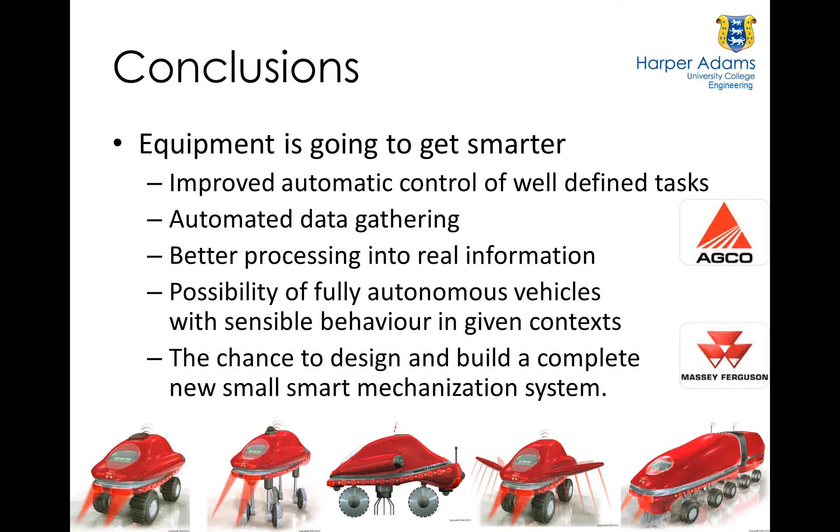If we can identify the given context, then it won't be such a problem, but there's the chance to come up with a new system. Here is a vision that I've got of this system, based on the best concepts that I've seen from around the world. I'm not saying they would look like this - I'm using this really as a discussion document where we can discuss what is actually going on and come up with new ideas.

Now, it's gone very quiet my end. Is anybody still there? We are still here. Pittsburgh is awake. Okay, all right.

Well, I've just come to the end of this now. So these are some of the concepts that I would see for agricultural robots. I'd be happy to discuss this with you in a question session now if you wish, and I'd be quite happy to follow up on this at another occasion. So that brings me to the end of my presentation, and if time and energy permits, I'd be quite happy to take questions or enter into a discussion.

Simon, can't thank you enough. This is great.